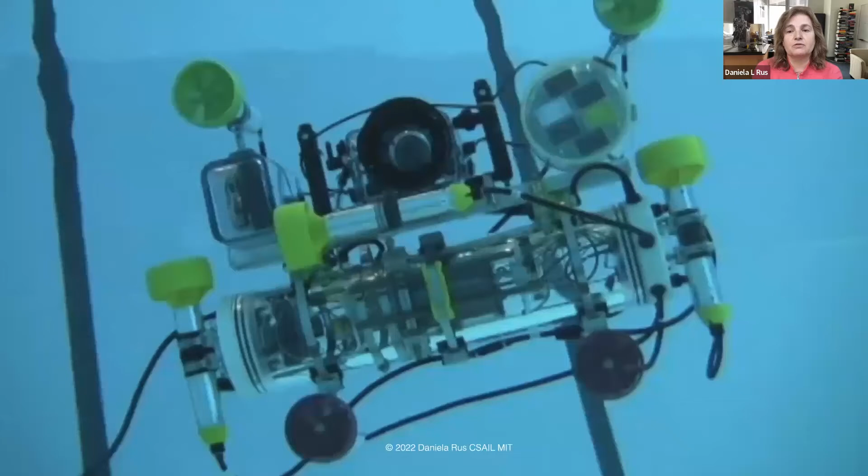And we decided to build an underwater robot together. It was our own version of 20,000 Leagues Under the Sea. We called this robot Amour, which stood for Autonomous Modular Optical Underwater Robot. But really, building this robot was about love. This robot was very lovable.

It was agile, it was nimble. It was one of the first underwater robots that moved like a helicopter. The robot also took beautiful photos in color and transmitted them using high resolution video. All of these capabilities were enabled by new advances made by the students in my lab.

Now, one very hot summer day after ICRA, off the coast of Singapore, we were there to test the optical communication system of the robot, and everything worked really well. In fact, we ended the experiments one day early. Then we decided to take our third day on the boat to see just how fast this robot could go, and we were feeling very confident that day.

We took off several safety components to give our robot more juice, and then off the robot went. Now, I should tell you that it took us 3 years to build this robot, and this was our only unit. Then we waited and waited and waited, but Amour did not come back. We lost Amour, and we were devastated.

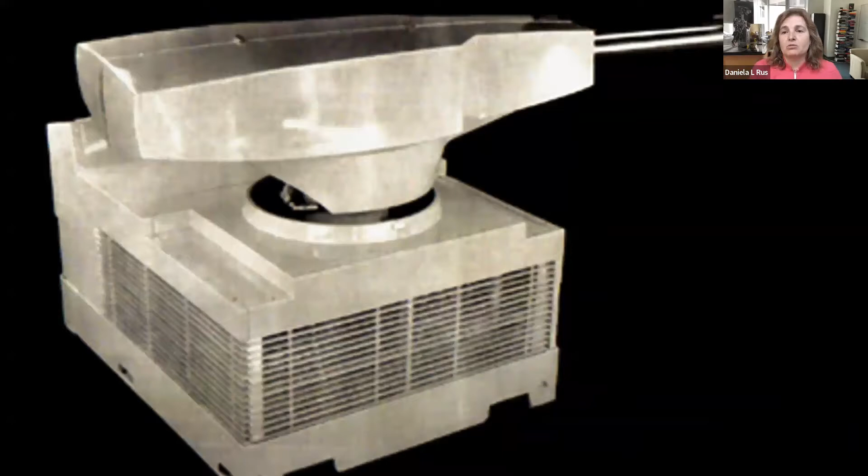So let me start with the robot body. Let me notice that we have come such a long way with robots. This here is the Unimate. It is the first industrial robot, which was introduced in 1961, and it was really quite a curiosity at the time. It showed how one can do industrial pick and place operations.

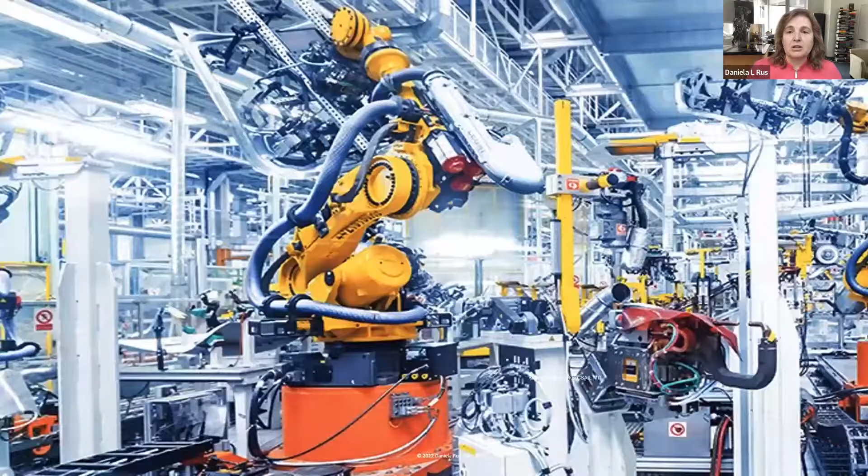And by now, the number of industrial robots exceeds tens of millions, and these robots are in deployment. These robots build our cars and do so much more. These robots are masterpieces of engineering. They can do so much more than what we can.

And yet these robots remain isolated from people on factory floors because they're large and heavy and dangerous to be around. And so a question that I have been asking recently is, how can we get robots to work side by side with humans? So in order to get there, we need better brains and better bodies.

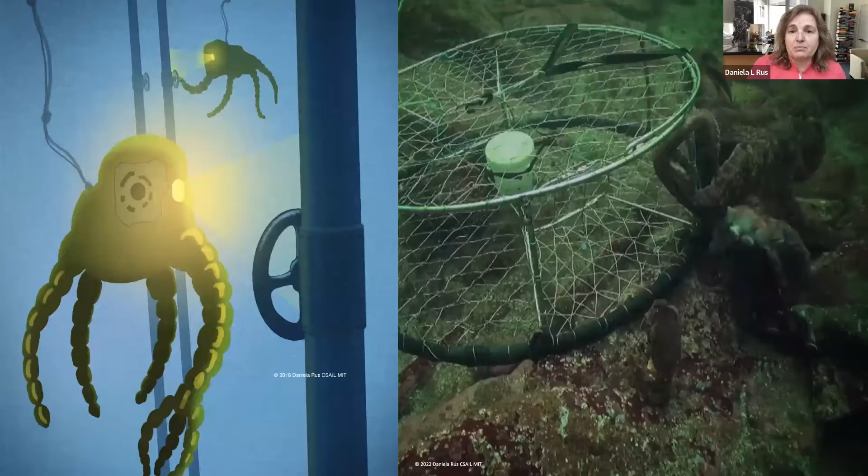Now if you look at organisms in nature, they are soft and compliant and so much more dexterous and intelligent. Just look at this octopus robot, how it moves. So can we have, sorry, it's not an octopus robot, this is my desire to have an octopus robot. This is an octopus. And so can you imagine having robots that are as dexterous and flexible as the octopus?

And in particular, these questions are inspiring us to rethink what is a robot. I'd like to observe that while the past 60 years have defined the field of industrial robots, have empowered hard-bodied robots to execute complex tasks in constrained industrial settings with fixed programs, I believe the next 60 years will be ushering in robots in human-centric environments, an era with robots helping us with physical tasks.

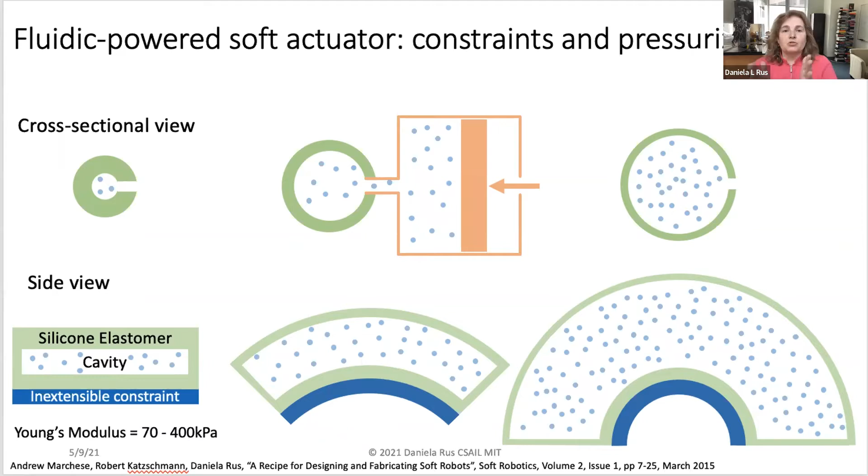The actuator of the robot essentially is made out of silicone. The silicone has some cavities and an inextensible constraint. The idea is that by pumping water or air inside this cavity, you can get a curvature, and then we can control how this curvature evolves, and that allows the tail to flip back and forth.

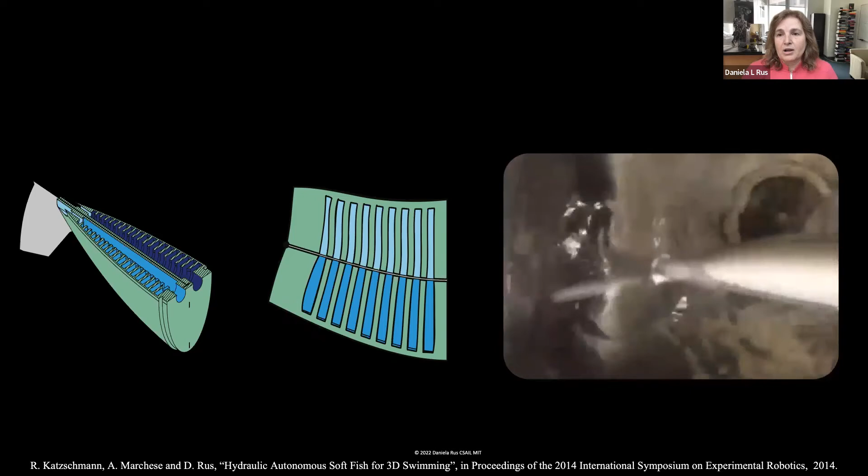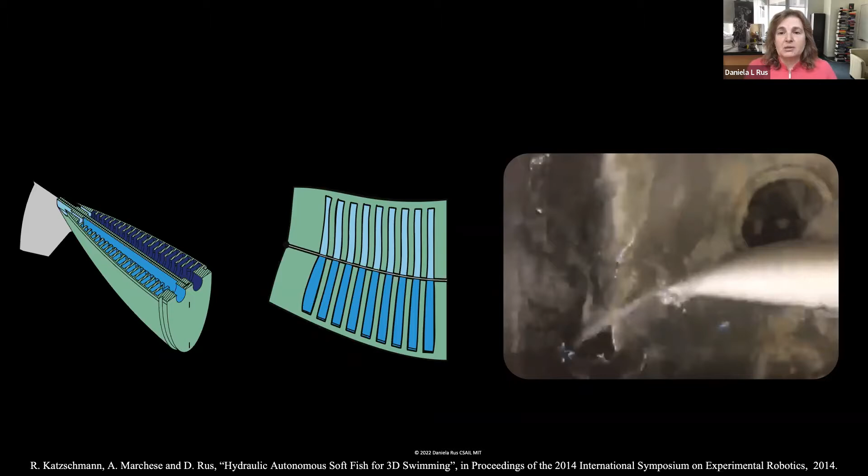Here you can see a close-up of what's inside the tail of the robot. The tail has these two chambers with ribbed structure for pressurization, and the inextensible constraint is in the middle. Maneuvering is accomplished by moving water from one chamber to the other using a pump. If you put the same amount of water in each chamber, the robot will move forward. If you put more water in one chamber than the other, the robot will turn either left or right.

So here is again the fish in action. You can see we have a gaming console that we adopted for underwater operations, and we give the robot high-level task commands, and the robot is able to navigate autonomously toward carrying out those task commands. You can see how the console works. The fish is executing a left maneuver in this case.

The fish has a fisheye lens camera that allows us to get observations remotely without being there, without disturbing the ecosystem. This is really exciting.

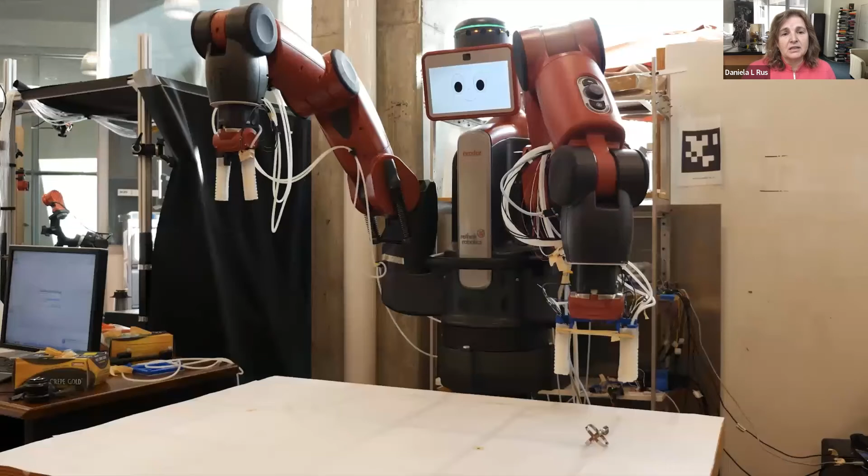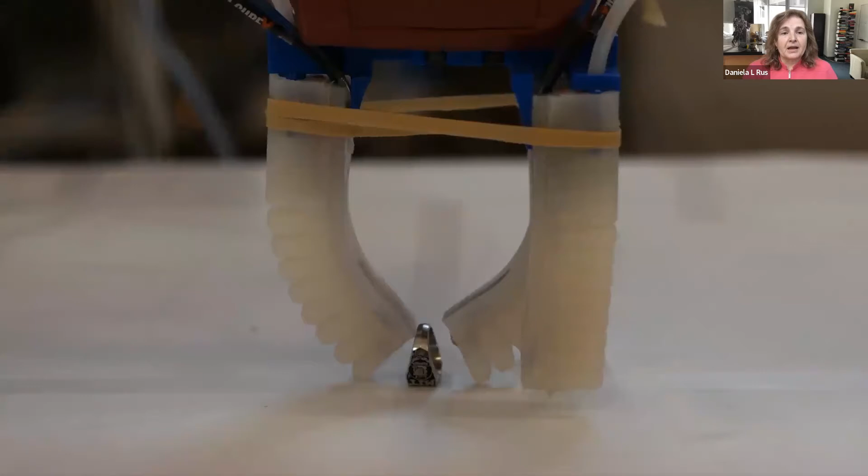The same control principles that we have used for the fish can be used to make soft fingers and robot hands. Here you can see a very early example of a robot with soft fingers, and you can see how compliant these fingers are. You can think of each of these fingers as being a kind of a half a fishtail. This robot is able to pick up objects without knowing their precise location and without knowing their geometry because of the compliance that is embedded in these new materials.

There are many challenges in designing soft robots. For instance, the power and control hardware of the soft robots needs to be within practical uses. The manufacturing and materials need to be integrated with sensing, and then we need to develop the control system for these systems. Building the control system is very challenging because rigid body control does not apply directly to these systems.

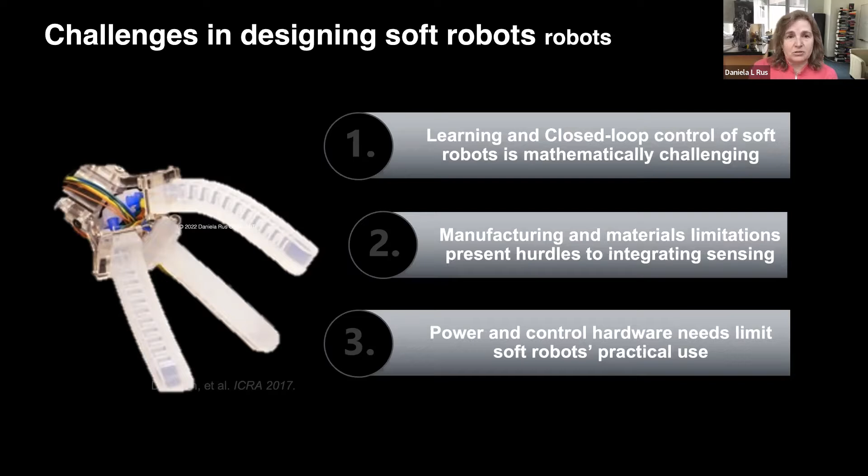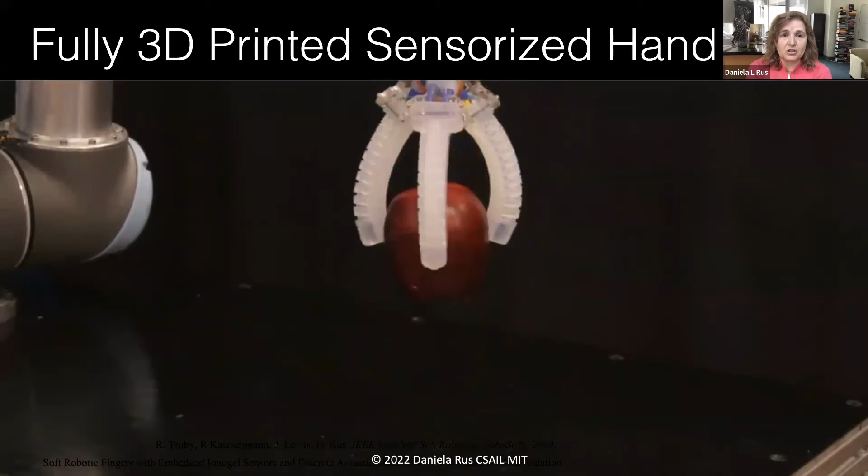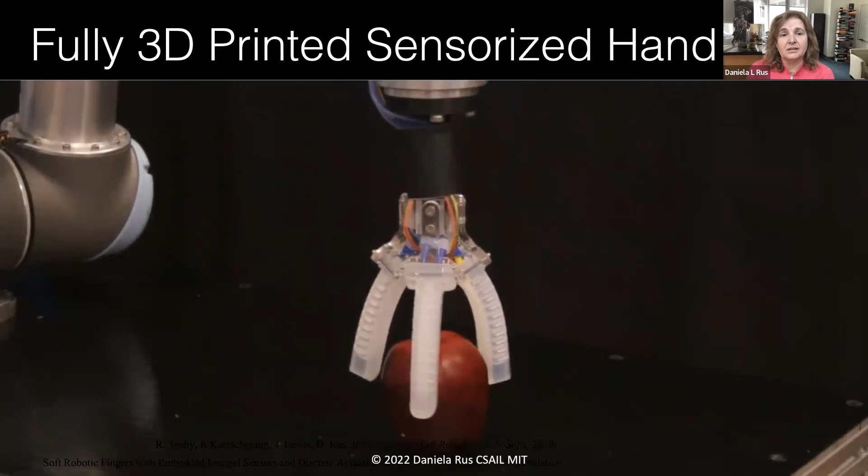So what we have done in our lab was to think about ways in which we can integrate the sensors, or the introduction of sensors, into the molding and fabrication of soft robots. Here you can see a manipulator that has embedded sensors and that can tell whether it has grasped an object or not.

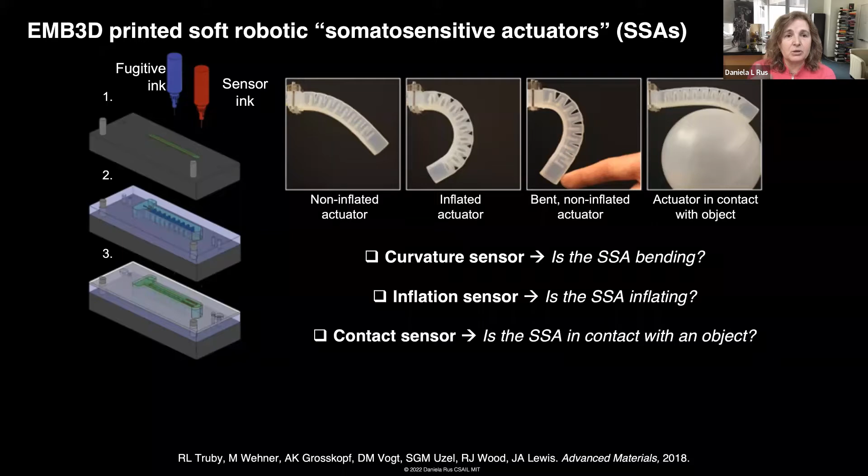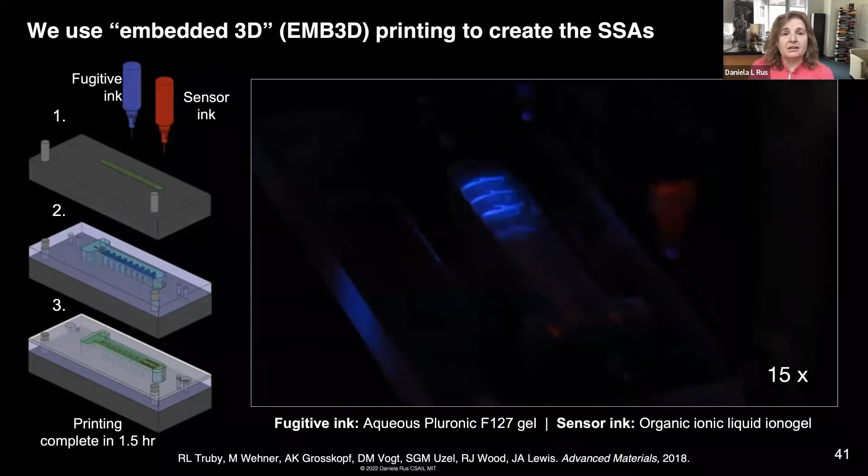This is done by a method we call embedded 3D printing. This method allows us to use a 3D printer to add the sensors we need into each of these fingers. In particular, we have curvature sensors, inflation sensors and contact sensors. This is how it all works: we have a process that allows us to add a fugitive ink to the silicone molded material while the material is curing.

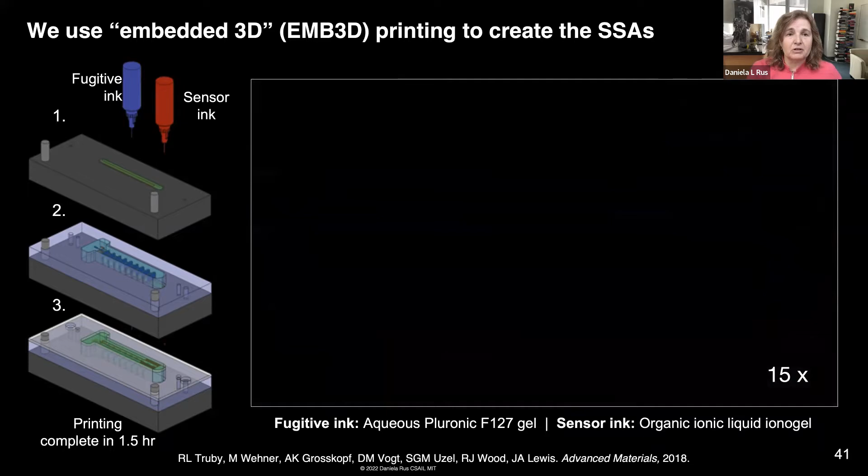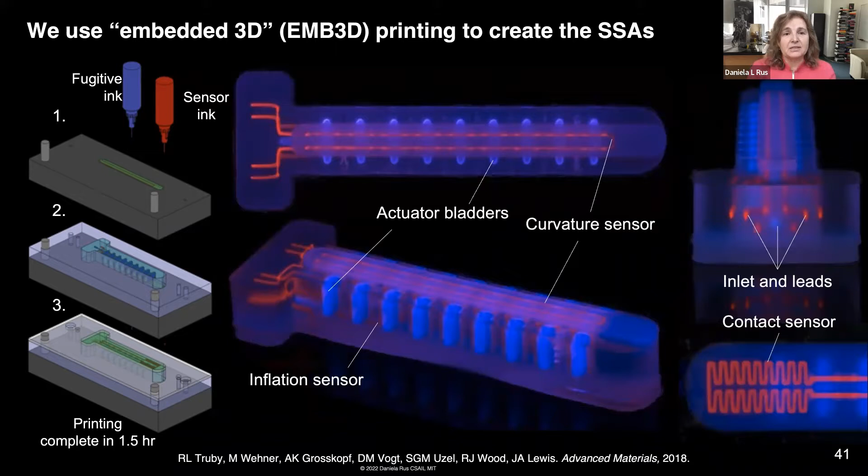This is really exciting because using this printed approach is a very natural way of incorporating sensors that have flexibility and elasticity, that are able to support our needs. It's also a very simple process to deliver on.

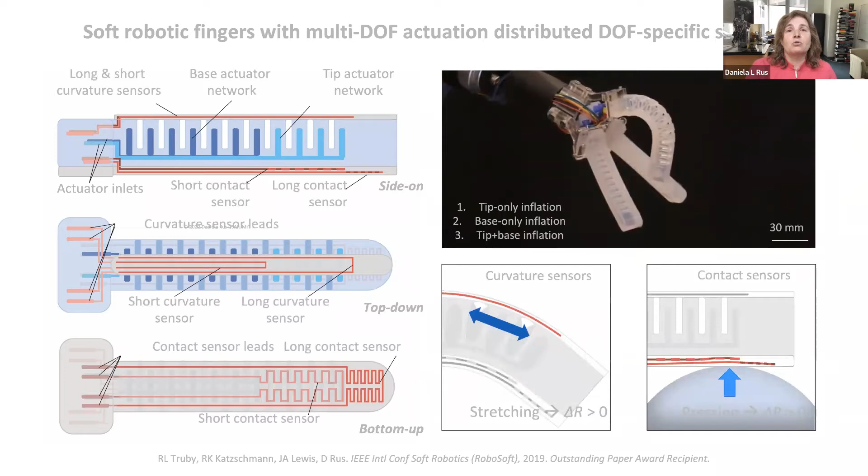Here's what each finger looks like and what the sensors included in the finger look like. We can differentiate between whether we have tip only inflation, base only inflation, or tip and base inflation. We can differentiate contact along the finger and at the base.

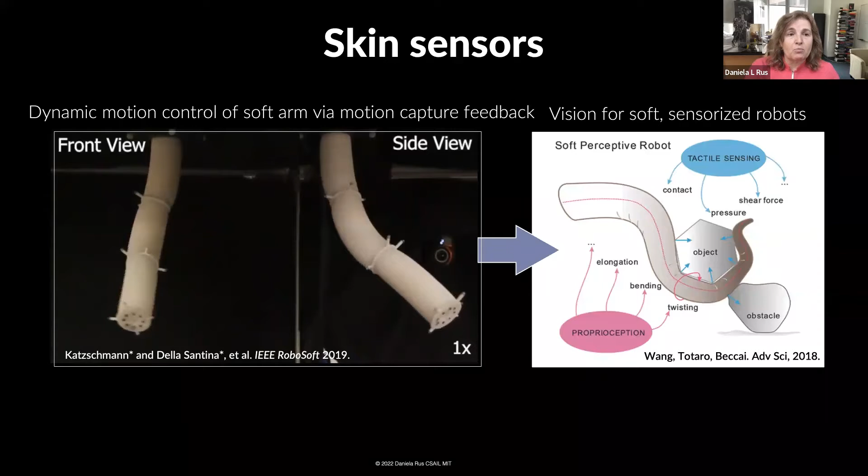We also have curvature sensors that show us how stretched the robot is. Now we have these sensors, but the question is, what can we do with them? Can we imagine creating a system that allows these continuous sensors embedded in the body of the robot to give us automatic measurements of the configuration of the robot? In other words, can we make these sensors globally proprioceptive, so we know the pose of the robot, because that will give us information about the environment and a handle on how we can do control.

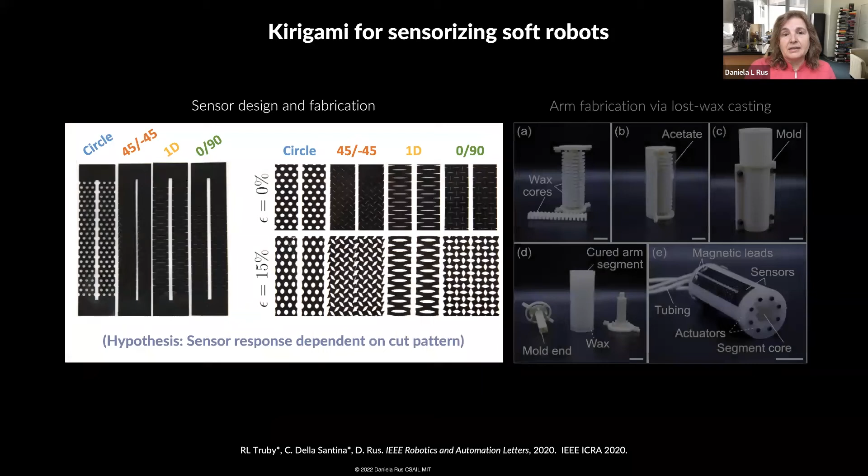In particular, is it possible to go from these simple linear sensors to more surface-like sensors? Here you can see another method we have developed for incorporating sensors, which we call kirigami. The idea is that we can build a skin where the sensor response is dependent on the cut pattern. We can learn how to associate the sensor response, the skin response, with the proprioceptive shape of the robot. The way we did that was by coming up with a model that describes the continuous soft robot.

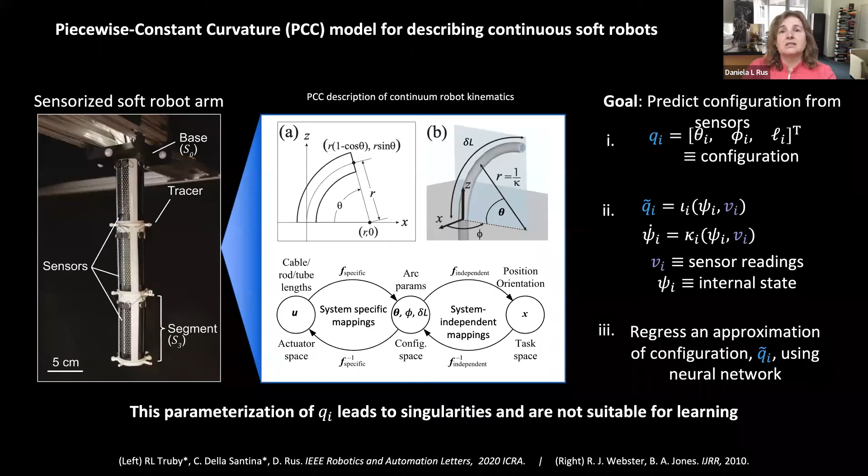We started with a piecewise constant curvature model, but we found that this particular parameterization leads to singularities that are not suitable for learning. So we replaced our parameterization, and we've been able to use this approach essentially in a data-driven fashion.

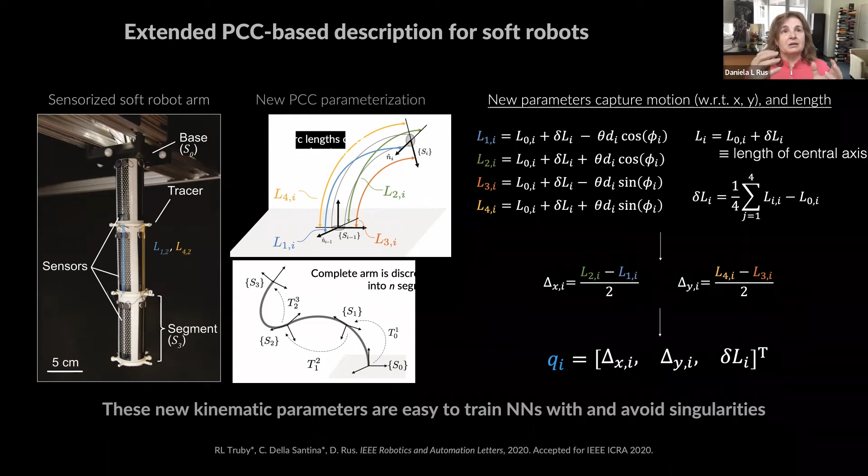We provide our robot, put visual markers on it, and show examples of the relationship between shape and sensor values. From this, we can use a machine learning algorithm to train a neural network that directly learns to associate sensory values with geometric configuration. So now we have intelligence - not only do we have soft robots with perceptual skin, but we also have robots that know what configuration they're in, and this is good for control.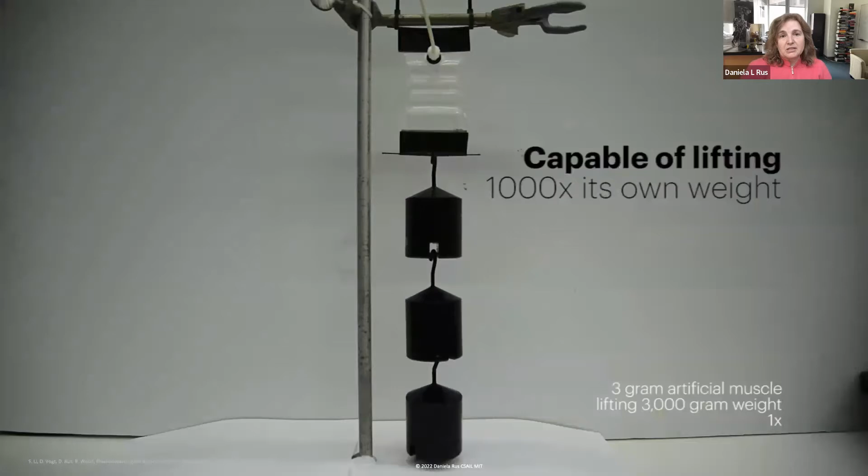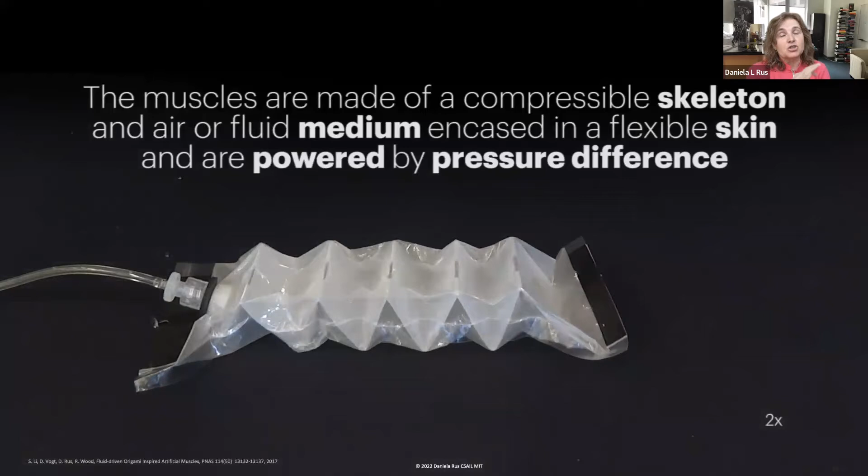The other thing we wanted to do is address the strength of our robots. If you recall, the design of the fluidic actuators - these actuators are not very strong. They cannot hold very much, and you have to put a lot of energy in to retain a shape. So we had the idea of combining soft outside skin with harder inner skeletons, like you see in these images, and the inner skeletons look a lot like origami.

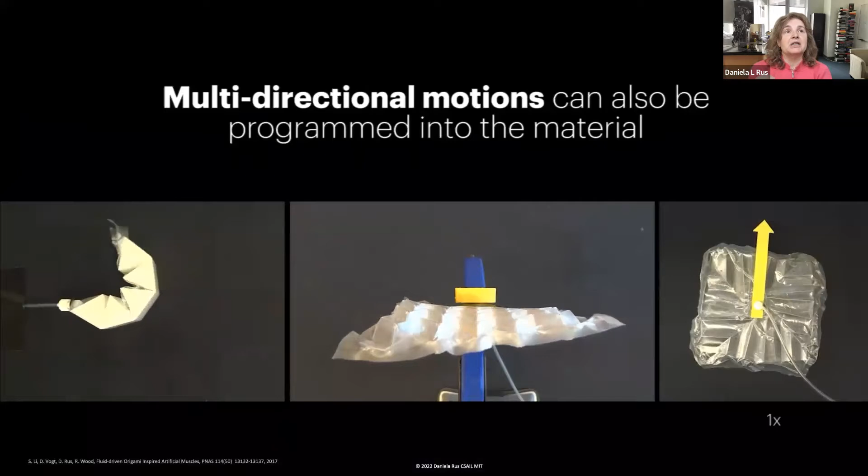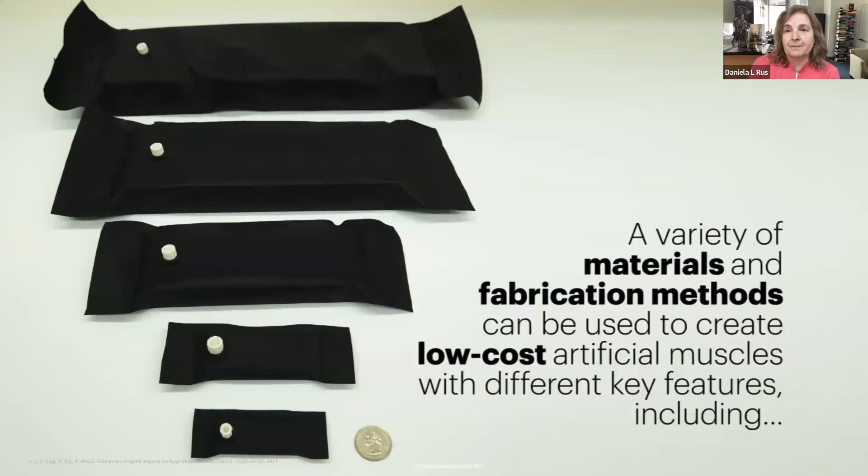It turns out you can do a physics analysis of the forces that can be generated this way, and by embedding these skeletons inside the soft robotic body, we can get robot systems that can lift up to hundreds and even 1,000 times the body weight. This is because of the interaction between the edges of the skeletons and the skin of the robot.

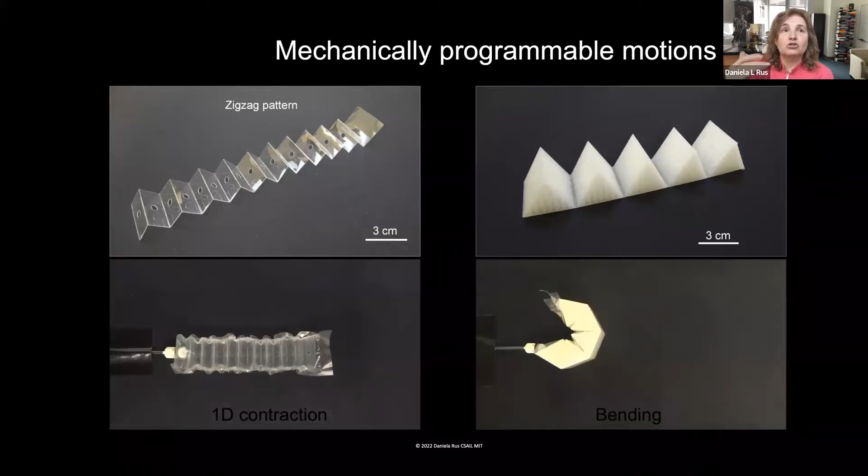The actuation principle is vacuuming, so it's not pressurization, it's vacuuming. It turns out we can exert some really strong forces, and we can natively generate various types of degrees of freedom. You can see a rotational degree of freedom and a contraction degree of freedom, depending on the kind of skeleton you put inside.

So you can design robots that have degrees of freedom naturally embedded in their bodies. This makes the control problem much easier. And then you can combine them - here you can see a linear actuator and a rotational gripper that allow us to formulate a different image of a robotic manipulator that is both strong and compliant.

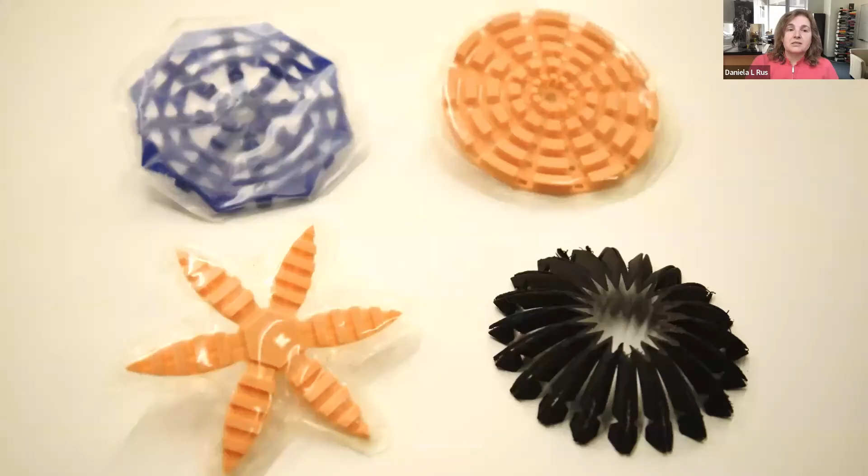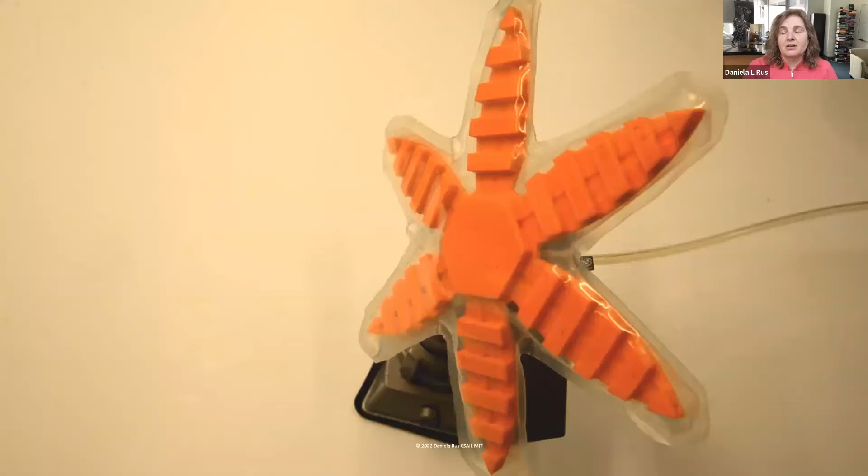Here you can see a muscle - this is what we call an artificial muscle. You can see a 3-gram actuator lifting 3 kilograms. We can design different types of grippers using different patterns. Here's one we call the flower gripper, and here is another version of the same made out of a different material. Now you can see how these robots can actually grasp.

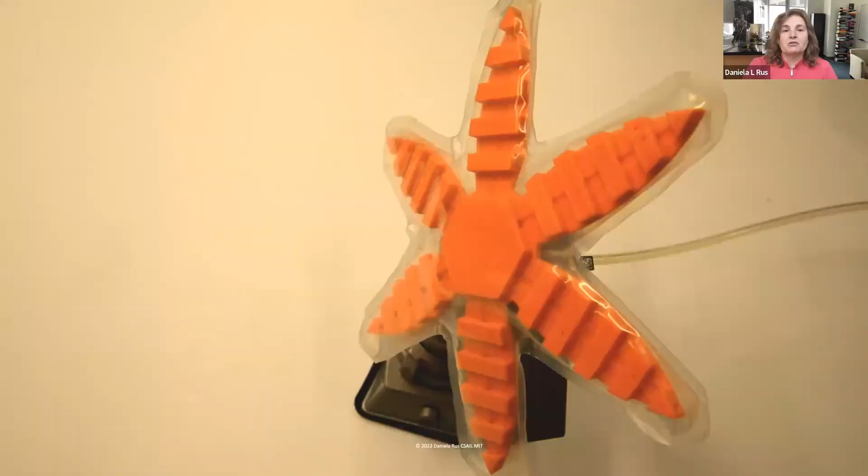We're very excited about the possibility of using new materials and approaches that allow us to design intelligence into the body of the robot. This is one way of moving forward and building more capable soft machines that go beyond the scope of operations of industrial manipulators.

Then the robot could take the best shape required by a task. For instance, you could have a snake that could crawl through a tunnel, or a kind of slinky form to climb stairs. Or if the robot needs a screwdriver from a shelf that's too high up, it could change its internal geometry to reach up there. So as the goal changes, the body of the robot can change too.

Here's a simulation we did a long time ago, back in the late 90s, early 2000s, showing how a couch robot could become a dog robot. In this case, the cell is a cube that expands and contracts by a factor of two. What you should get from this is that the computation and algorithms required for shape transformation have come a long way. But we still need to make the cell, and we don't yet know how to make it at a scale where the couch would be comfortable to sit on.

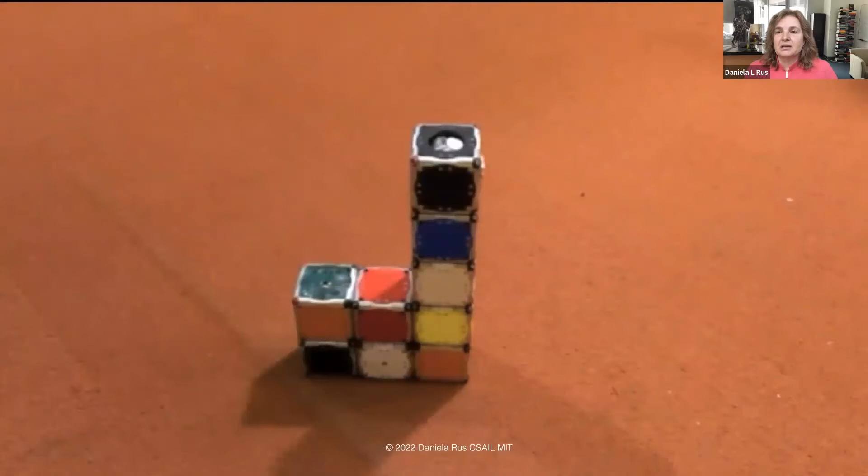So how far are we in development of that dream? Today's robot cells are still too big to make a comfortable dog couch, but we can make simple things - shape-shifting trusses, support beams.

Here you can see an example from our robot, M-Block. This robot is a two-inch by two-inch cube that moves by pivoting, and the secret to the movement is a flywheel inside the robot. This flywheel spins very fast, and then a braking mechanism stops it suddenly, and the stored momentum propels the cube forward.

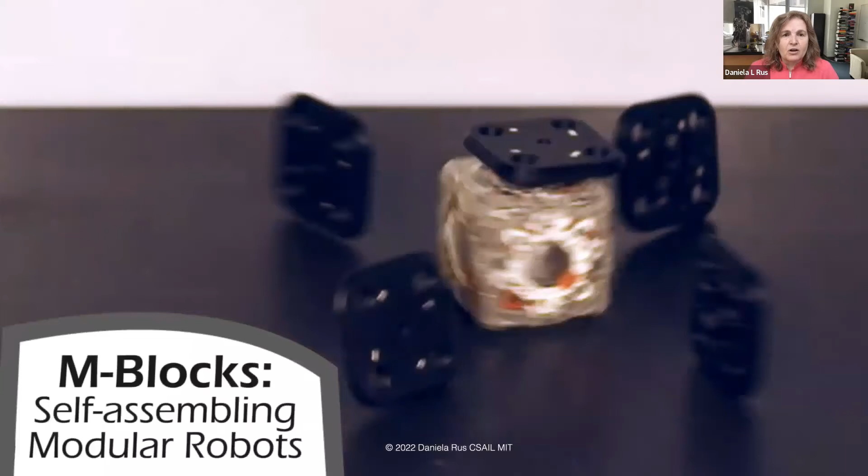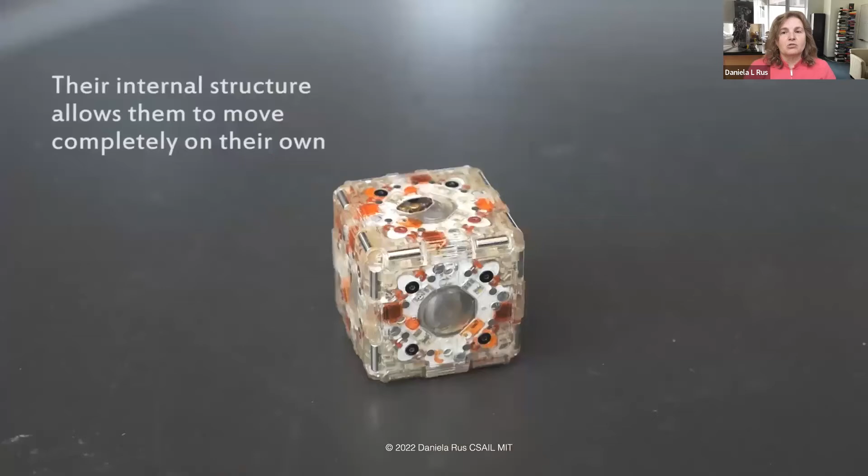You can see another version of this cube, where you can see a little bit inside the mechanism. The flywheel can be oriented along different axes, so you get movement along the X, Y, or Z axis. This is really cool - we're very excited to have the M-Block, but it's still not going to give us the comfortable couch.

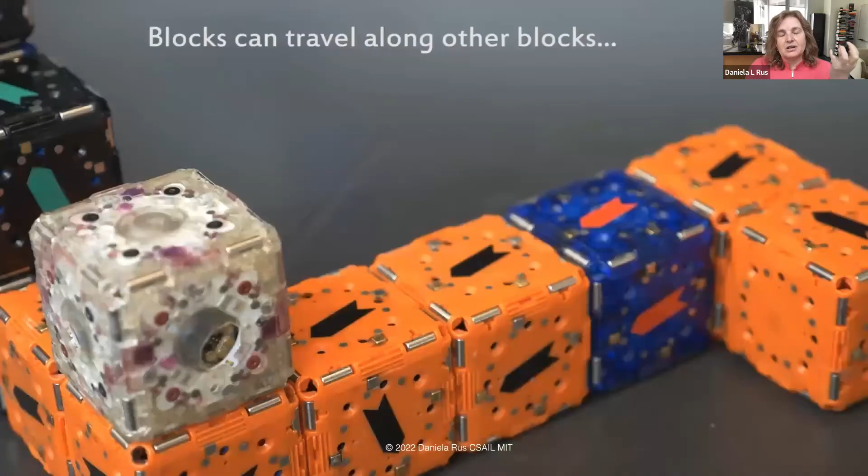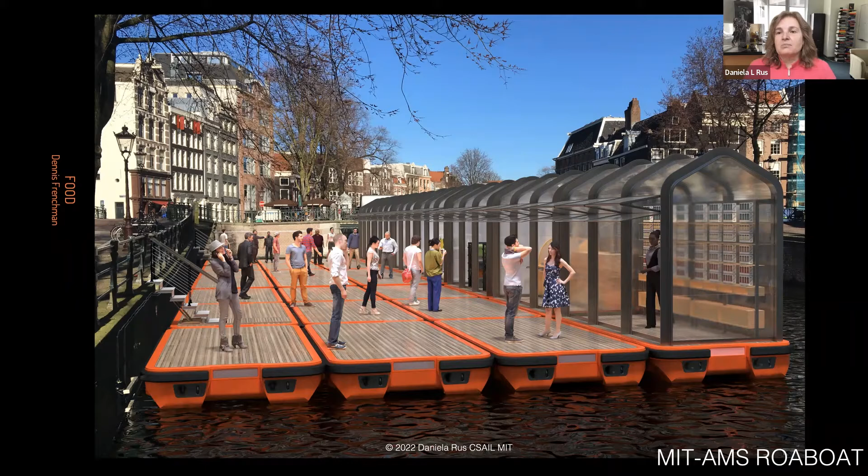So we started thinking, rather than making small things, can we make bigger things? While we can't have comfortable modular couches, we might be able to do big applications - like robotic boats that can carry people and goods, that can self-assemble into autonomous platforms for people to gather for events, or water-based bus stops or bridges on demand.

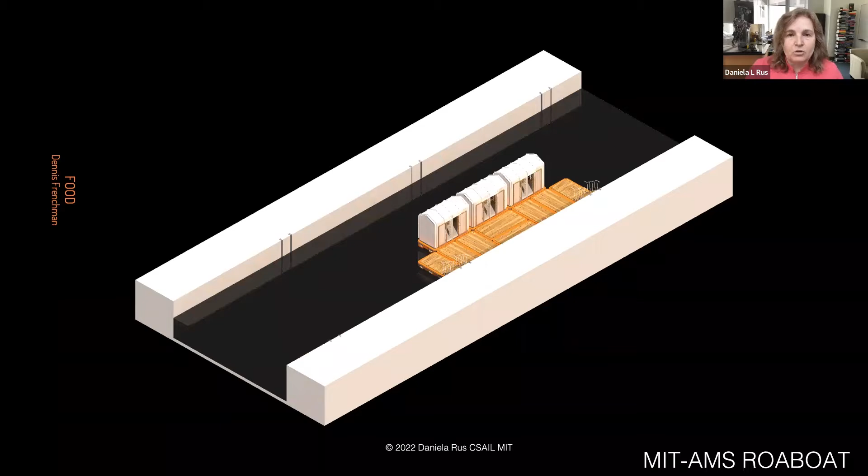The concept is that you might have robot boats assemble to make this platform, and when people arrive, they have a step to go onto before reaching shore. Then maybe you can add manipulators to these platforms, and move some infrastructure operations to autonomous operations on the water at night.

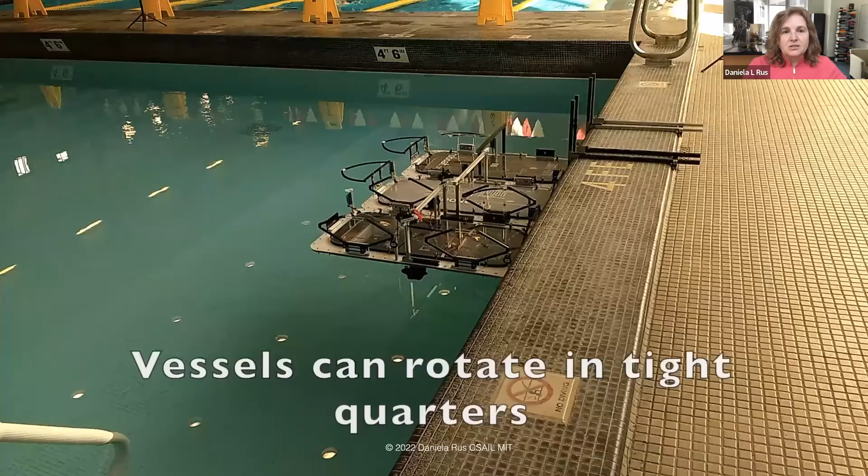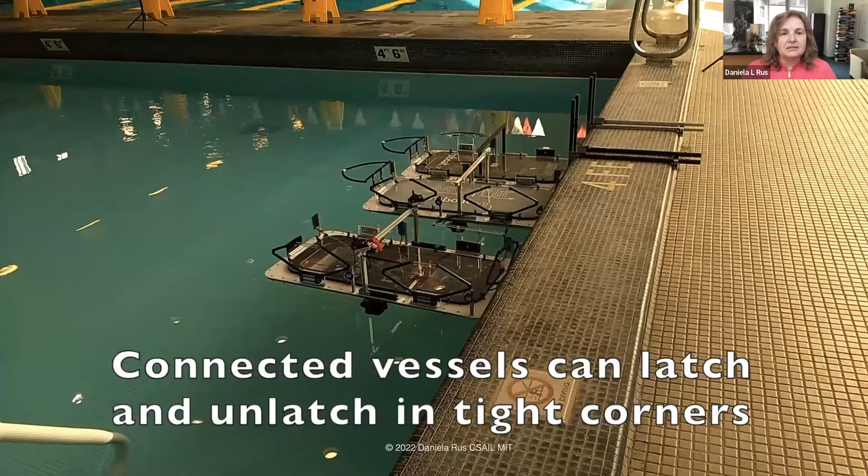So how far have we gone with the concept of modular robotic boats? Here's an example where we've achieved a robotic boat at the quarter scale we wanted. You can see there are multiple independent platforms - each can move independently, yet they can connect with each other and move together, combining thruster action to move in a coordinated fashion, which is very exciting.

We've tried a number of different designs for these platforms, but ultimately where we want to go is a full-scale platform. Here you see the full-scale autonomous robotic boat that has been deployed in Amsterdam. This boat has the same sensor suite you'd see on a self-driving car, and it has the same algorithms for navigation, localization, and map making that you'd have on a self-driving car.

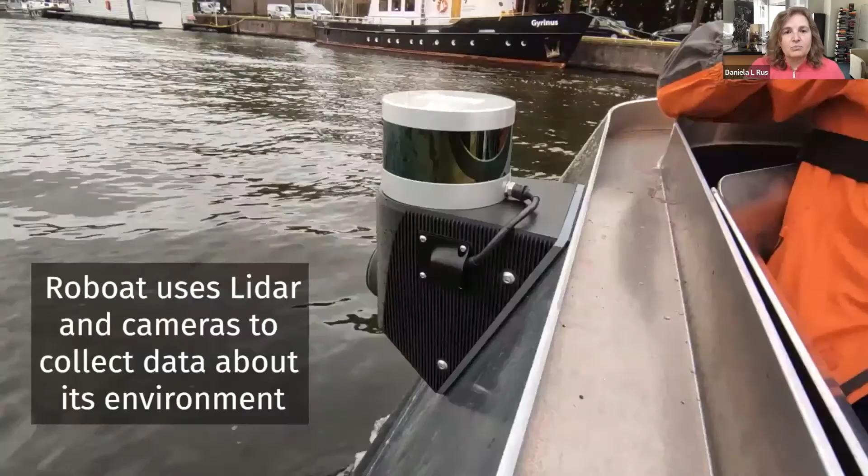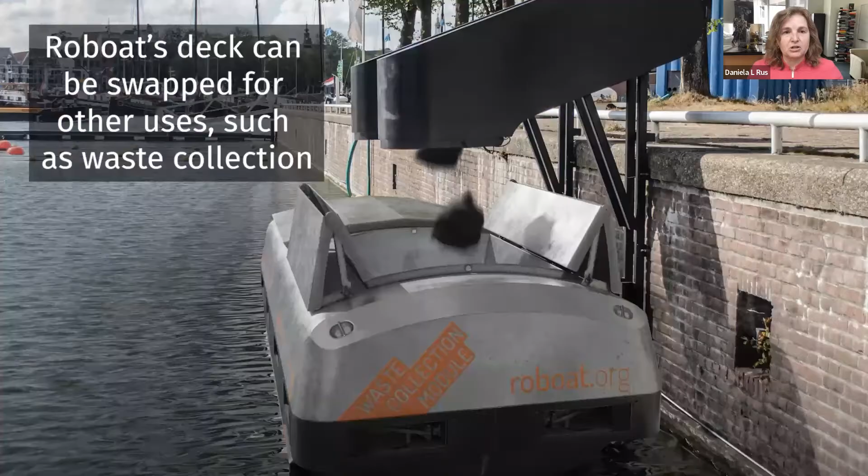It's not quite as easy as taking the software built for a car and putting it on a boat, because the car moves on a straight surface, while the boat moves on water with waves, and the dynamics of the boat change depending on how many people are in it. But it is possible to imagine a robotic cell that will be an autonomous boat, achieving this idea of on-demand platforms and bridges. We're very excited about the potential of this application and are continuing to work on it.

So we talked about materials that give us better capabilities, and whether we can make robotic cells. While we continue to work on robotic cells, we've started a parallel second option, because I don't know how long it will take until we develop the foundations to get these robotic cells to be truly universal.

Instead, we had the idea of developing coding tools that automate the design of custom robots, and making tools that automate their fabrication. Rather than having a universal robot, we'll be able to make very fast robots customized for the task they have to do. I hope this can take us closer to a world where people have a robot for any physical task.

Here's how this could work. Let's take a user who's not a robotics expert - let's call her Alice. We'd like to give Alice the power to automate many tasks in her home. Say Alice wants a playmate for her cat when she's at work. She could go to a store we call 24-hour robot manufacturing, where she has a rough idea of what she wants, explores the design space, and once she settles on a design, the robot can be fabricated and the cat will have a playmate. The idea is for this process to be fast and inexpensive.

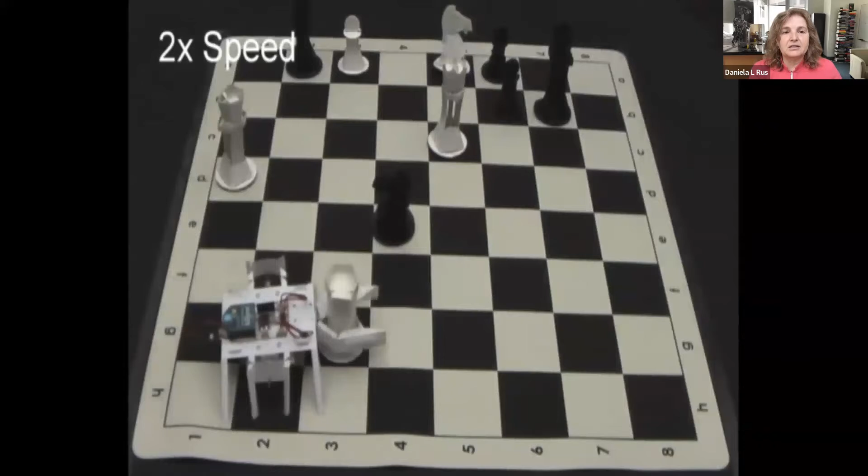My research group at MIT is working on this problem, and here's how we're approaching it. Say Alice wants to play chess with a robot. The idea is to provide the functional specification of the robot, and from this specification we can determine behaviors such as pick up piece, move piece, drop off piece. Then from these behaviors we can generate mechanisms that implement those behaviors, assemble components, print the components, and we're done. Here is a robot developed in an almost automatic fashion.

We call these robots origami robots because they're created by folding, inspired by the ancient art of origami. Origami robots can be fabricated flat and folded by hand, but we can also automate folding to create robots that can run, carry a load, and travel very fast - 4 body lengths a second. Here you can see our robot that starts like a piece of plastic with a very specialized design, and when this plastic gets heated, the robot lifts from 2D to 3D and can now do interesting things. When the robot is done with its task, it could go recycle itself.

I don't know if you're aware, but there are over 50 million tons of waste generated every year. The big problem with most electronics is that they can't be recycled, and they're toxic when discarded in developing countries. We should really think about making robots that will not create electronic waste.

So I'm going to skip this. We can make these robots at the small scale and at the large scale, but even at the small scale, the robots can be useful.

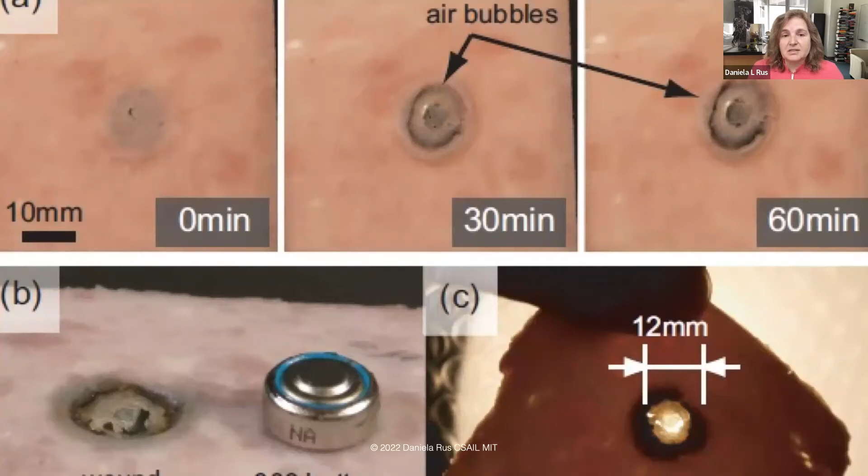For instance, in this example of what we call the origami mini surgeon, we're building a custom robot to remove button batteries that have been swallowed accidentally. In the US, 3,500 people swallow button batteries every year - these are the batteries in toys and watches. The problem is that these batteries pierce the stomach tissue very fast, in 60 minutes, and the only way to remove them is through surgery, which is not an easy option.

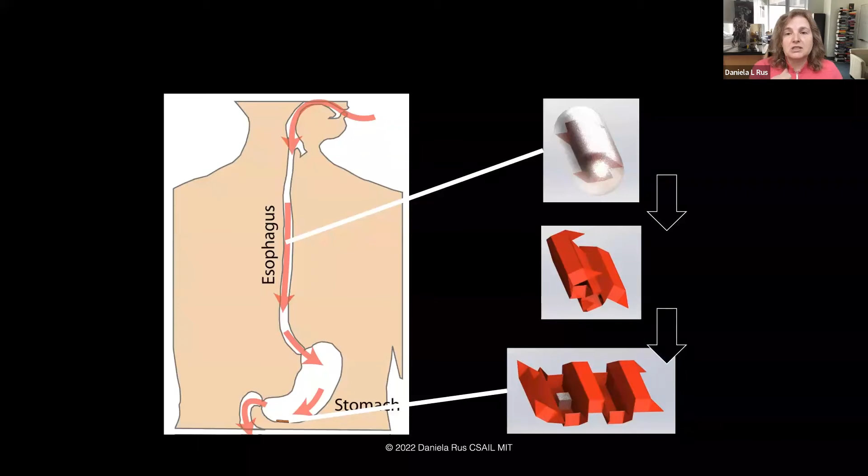Now, what if we could have a mini robotic surgeon, imagined as an origami structure that could be squished into a pill-size system? This pill is about the size of a regular pill, but made out of ice. The idea is that you swallow this pill; when it gets to the stomach, the ice melts, the robot deploys, and it can be controlled using an external magnetic field to get to the battery, pick it up using an embedded magnet, and eliminate it through the digestive system.

So here you can see the robot in action in a simulated stomach. And you can then send a second robot that could patch the wound and deliver medicine at the location of the wound. What's interesting about these robots is that they're made out of food—sausage casing, specifically.

As a result, they're not toxic when you swallow them. So you can imagine using this technology in the future to obtain tissue samples, to stop bleeding, to get better views inside our bodies, all without incision.

So how do we automatically design these robots? Here's the idea: we can create any 3D object, for example this bunny, by folding layers with the correct geometry, so that when you stack up the layers, you end up with the geometry of the desired object. We actually have algorithms that can do all these steps automatically.

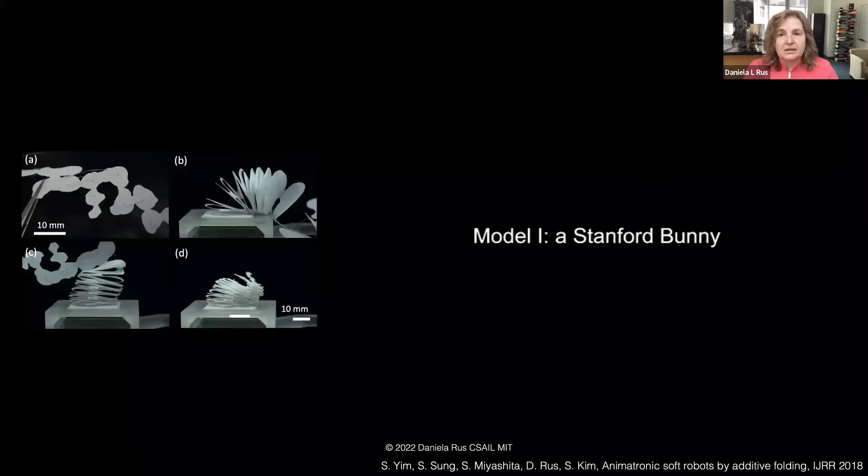Here you see the folded layers, 3D laser cut, and these layers are very interesting—they create some built-in degrees of freedom for controlling the robot. With this approach, we can take any regular object from the environment and make it animatronic and roboticized.

Let's listen for just a minute.

So we can take these approaches to designing robots, and we can turn any object in our built environment into a robotic system. I'm really excited about this because ever since I was a kid, I really wanted to be like Mickey Mouse in The Sorcerer's Apprentice.

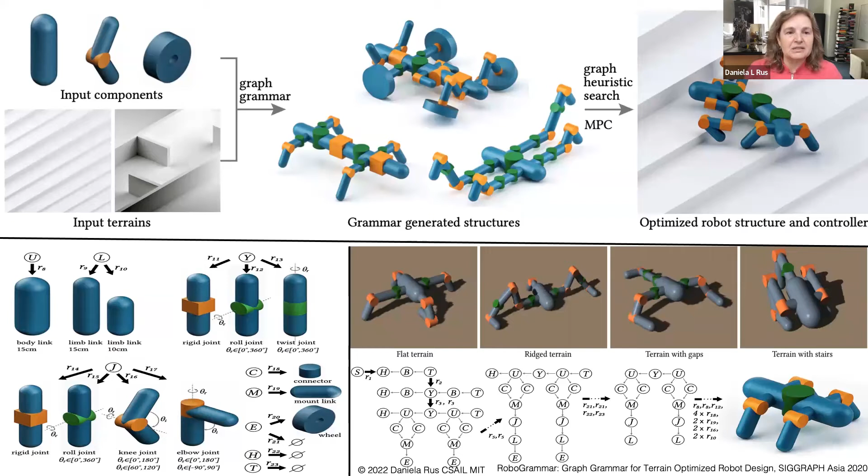So we have another method for automatically designing robots, and this method is inspired by computer science. It's a grammar-based method. The idea is that you could take all the possible components that exist, put them in a database, and then create a grammar that talks about how the components can be connected to one another, adding constraints on the task that the robot has to do.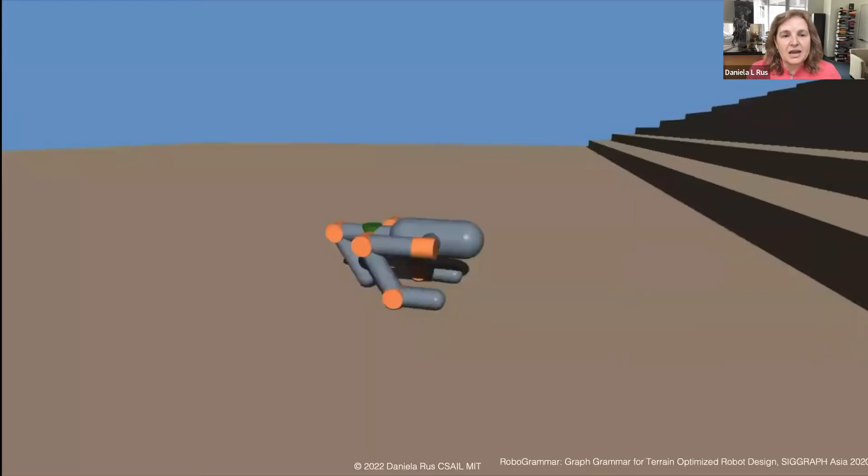Here you can see an example for creating a legged robot optimized to do various manipulation tasks. This is what comes out of doing search, machine learning, and optimization on a set of designs using a set of components. You can see that the system comes up with very different designs depending on whether the task is to jump, to jump upstairs, to run as fast as it can, or to jump over gaps.

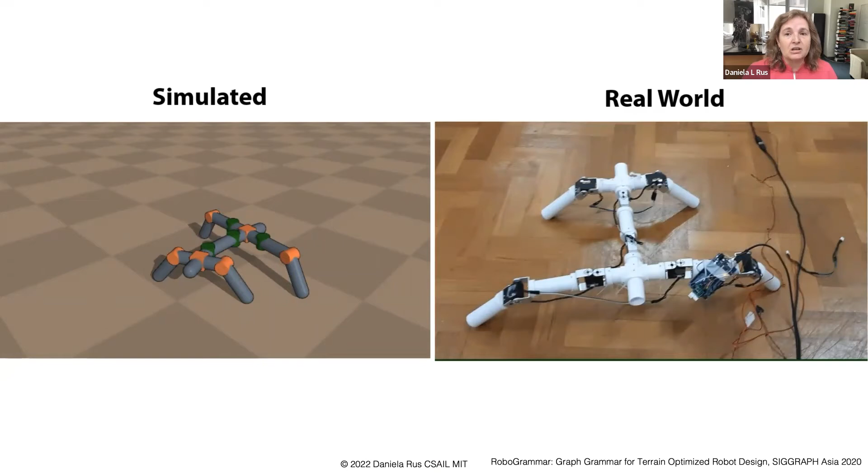We can take the simulated examples and then go back to our components that define the library. This way, we really accelerate the fabrication—the design and fabrication of custom robots.

I have just a few minutes, and I do want to say a few things about the brain of these robots. We talked a lot about the body and how we use computation to design it. But I want to say a little bit about the brain, and in particular how we can use machine learning to get these new robots to learn how to control themselves.

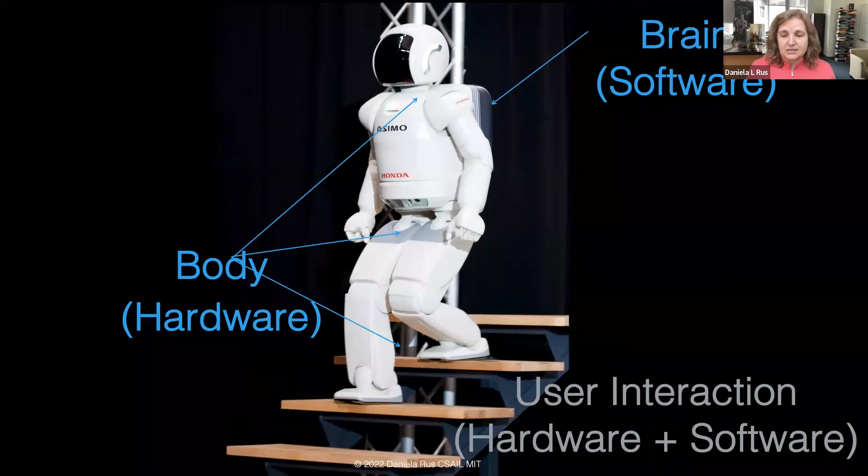In the last example I showed you, we actually have co-design of the body and the brain. The machine learning system that searches the design space does so with the objective of a particular robot task.

Now, in general, when we use machine learning in robotics, we have a number of issues we need to deal with. First, data availability—machine learning today requires massive data sets, and these are not easily obtainable in robotics. The data quality has to be very high, the cost of computation is non-trivial, and we end up with black boxes—we don't really understand how they work, and they have brittle function.

And the question is, can we do better? I want to show you an approach for how to do better. I'd like to show that approach in the context of learning for self-driving vehicles, because I think a lot of you are familiar with this problem. But this approach can be used for manipulation or any other robot task.

So the classical approach to autonomous driving is to take the problem and break it into sub-problems, solve each problem individually, and then connect the solutions. This approach is challenging because you have to come up with parameters for each type of environment where the robot operates, and these parameters have to be done for each sub-problem and also for the connection between sub-problems.

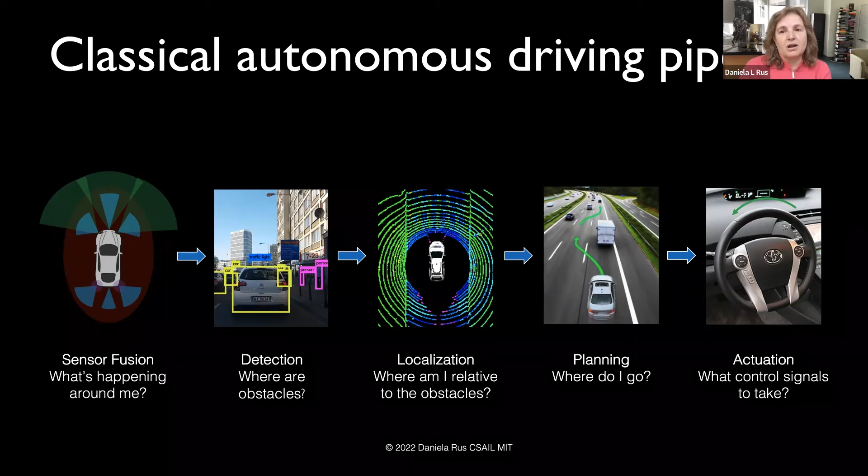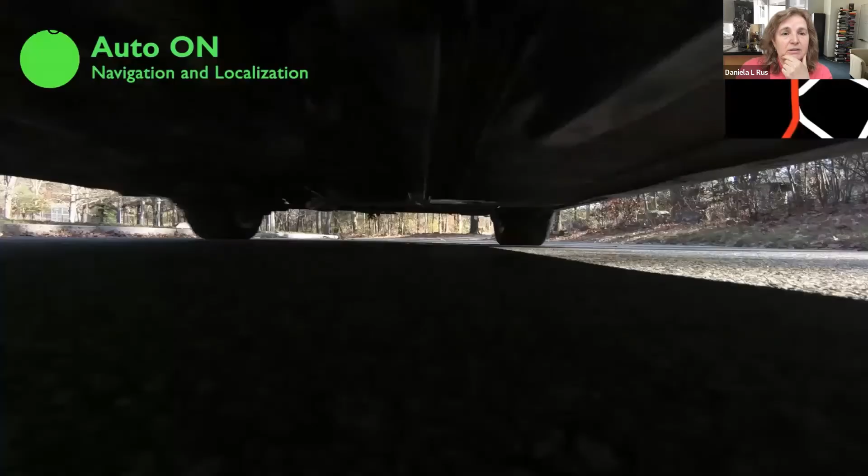So if it's nighttime driving, urban driving, or country driving, all of these situations require different parameters. We've been interested in going directly from sensor data to actuation, because this does away with the need of manually figuring out the parameters. And in fact, we have done this. We have successfully developed an end-to-end learning approach that enables us to drive, and it enables us to train vehicles in one environment. This one was trained in an urban environment, and here it is going through a country environment, very different than where it was trained. So this is very encouraging.

And we have come up with a different approach to the neuron and also to the architecture of the network. The new neuron we are working with is called a liquid time-constant network, where the neuron has a differential equation rather than a step function inside it, and this differential equation can have variable time. The architecture is something we call neural circuit policies, where we can specialize the neurons, and we're able to go forward and backward with the edges.

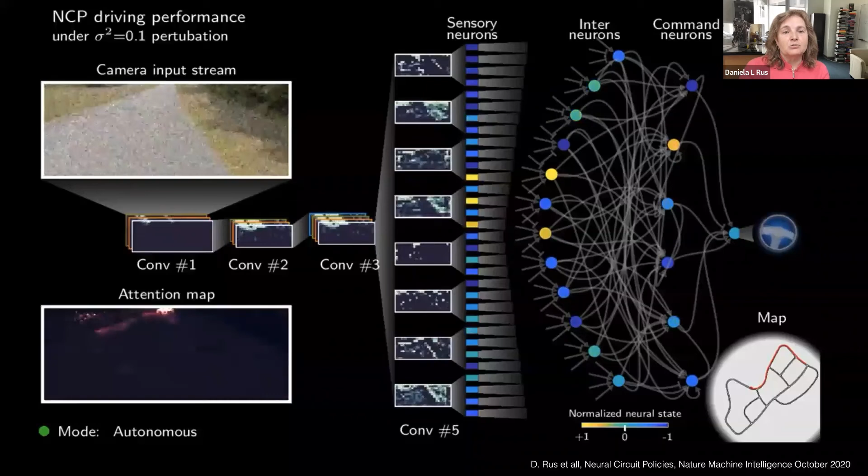So I'm very bullish about the idea of exploring new approaches, new architectures for machine learning, because what we have now, the deep neural networks, are decades-old ideas that have been enhanced by data and computation. But for safety critical applications, it's actually important to be able to understand how the network makes decisions.

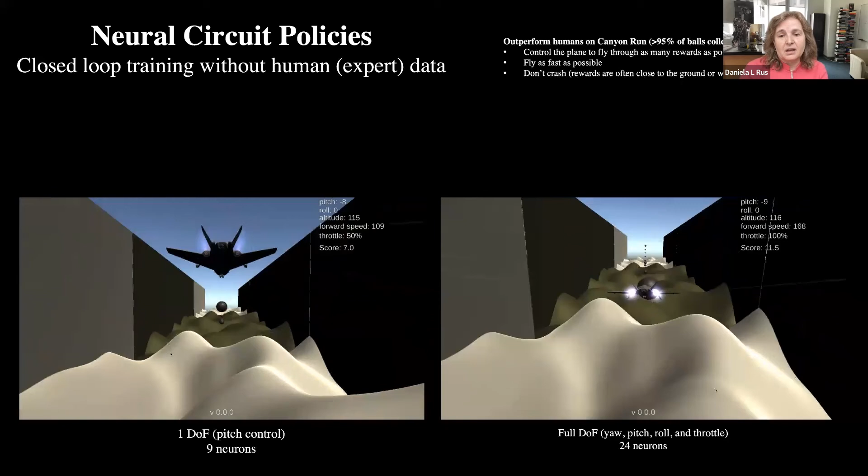I'll show you another example. Here is an example for flight, where a 9-node neural network is learning to fly safely in the canyon and hit targets. And if you want the full degrees of freedom, then it takes only 24 nodes to do this very complicated task. So very exciting opportunities for developing new robots are ahead of us.

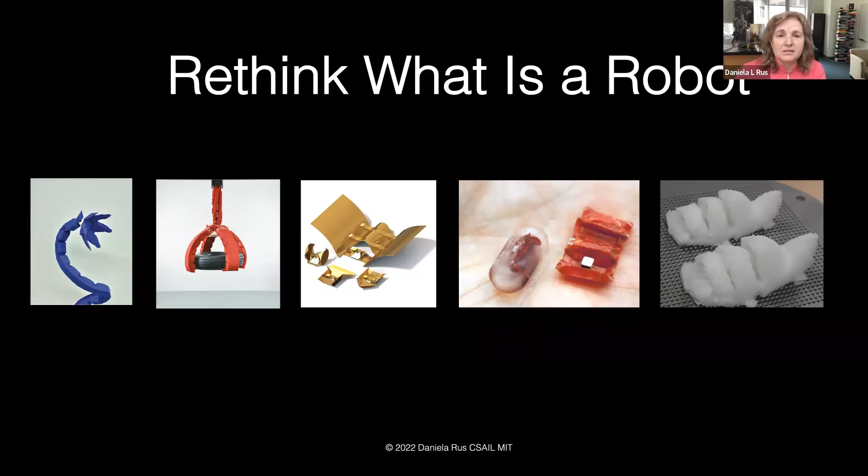I hope that the examples I have shared provide us with a good starting point for reimagining robots, for what they look like, for what materials they're made of, and for the kinds of things that they can do. I want to go back to what I observed: I really believe that the next 60 years are going to usher in the age of adaptive soft robots and pervasive robots with form diversity, material diversity, and a wide range of capabilities. And the current generation of students are going to be the inventors that will make this dream come to life.

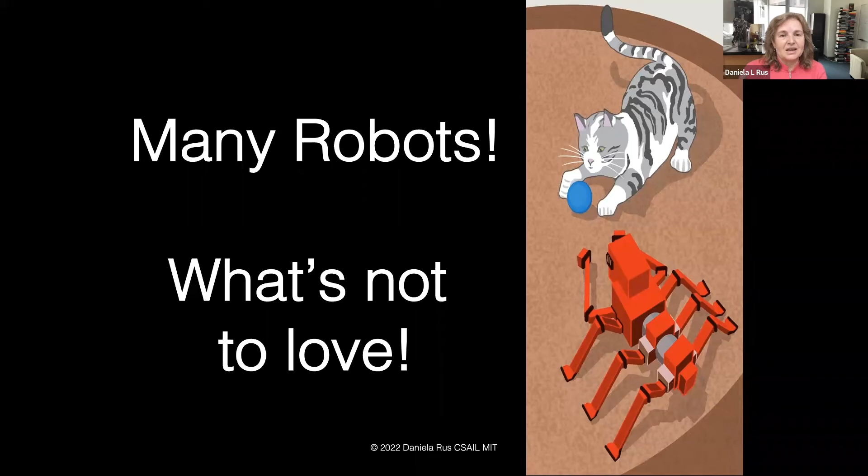Today, if you can think about the concept, you can write it on paper. But imagine a world where if you can think it, you can make it, and you can breathe life into it through programming. In other words, a world where anybody can make their own robots, customized to tasks, customized to ideas that save lives, improve lives, carry out difficult tasks, and take us places we can't physically go to. And in this world, we will be supported by cognitive and physical tasks by robots. So what's not to love?